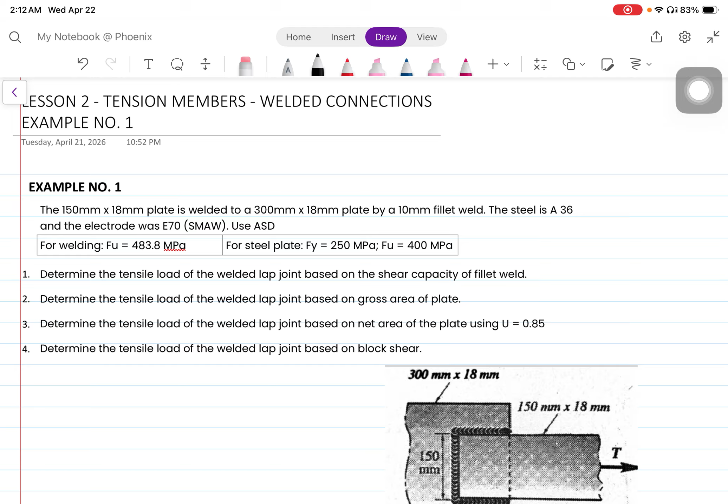Welcome to part 2 of tension members in welded connections, and let us have now our example number 1.

For example number 1, the 150 mm by 18 mm plate is welded to a 300 mm by 18 mm plate by a 10 mm fillet weld. The steel is A36.

And the electrode was E70 SMAW. Use ASD. So for welding, we have the tensile strength of 483.8 megapascals, but for the steel plate, we have Fy equal to 250 megapascals and the tensile strength is 400 megapascals.

First, determine the tensile load of the welded lap joint based on the shear capacity of the fillet weld. Next, determine the tensile load based on the gross area of the plate. Next, determine the tensile load based on the net area of the plate using 0.85 as the reduction coefficient. Then determine the tensile load based on block shear.

Baka nagtataka kayo na meron gross area, meron net area, meron block shear. Hindi naman siya na-discuss during the introduction, right? Take note na kung ano yung ginamit natin during our bolted connections, gagamitin din natin dito sa ating welded. Nadagdag lang ngayon yung shear capacity natin pagdating kay fillet weld.

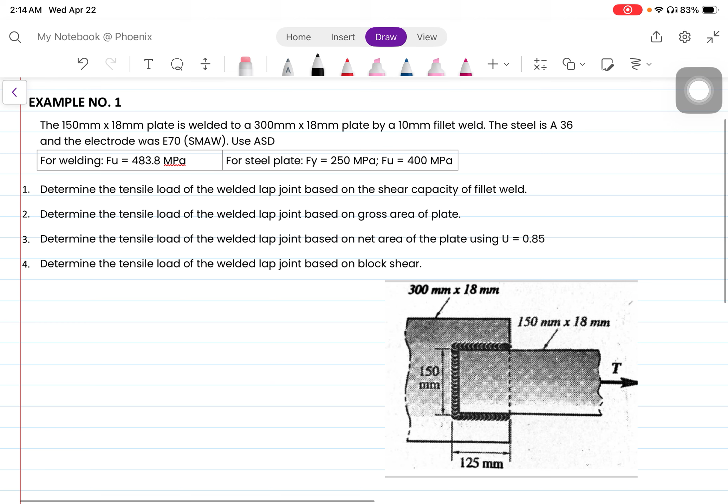So with that, let us now solve for number 1. Pero lagay muna natin, isa-isahin muna ulit natin yung mga given sa atin. Binigay na tayo agad ng 10 mm fillet weld, so therefore this is already your W.

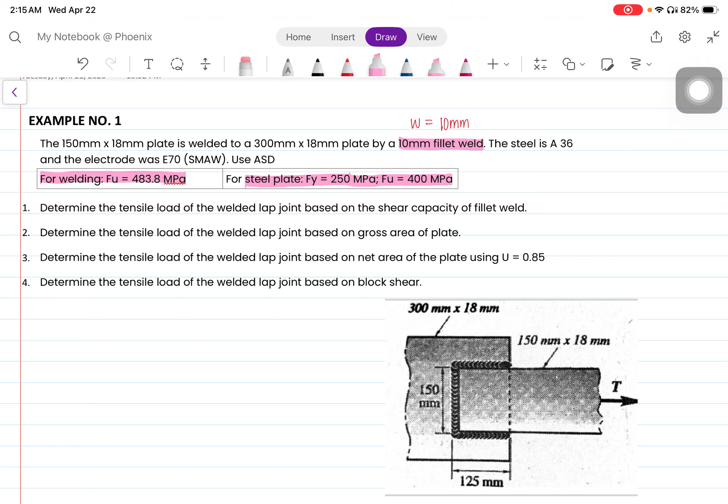Hindi mo na kailangang maghanap or mag-design pa ng weld size mo. Binigay din sa atin that this is an A36, pero nagbigay na rin siya ng FU equal to 483.8 megapascals for our welding. And then for the steel plate naman, Fy is 250 megapascals and 400 megapascal naman for our tensile. Okay, and this is our figure.

Now sabi sa atin, hanapin daw muna natin si shear capacity of the fillet weld. So actually, this is just the tension pa din naman yun, no?

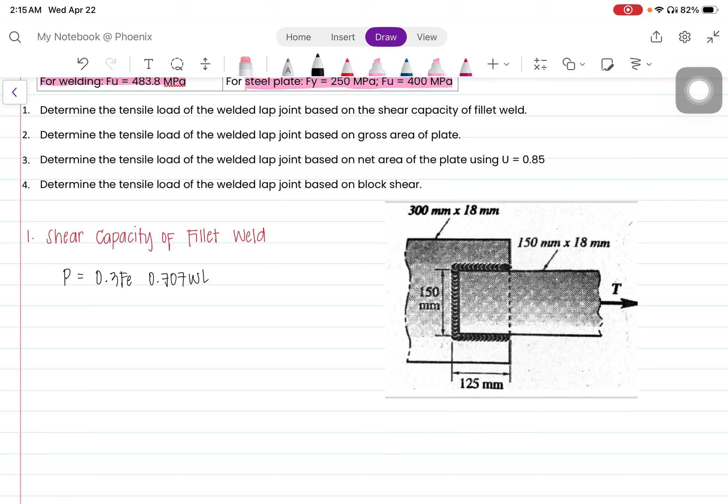So with this, ano na nga yung formula natin? Di ba ang formula natin dito is P equal to 0.3 FU natin multiplied by 0.707 ng ating WL. Okay, so ang gamit nga pala natin is FEXX. So si FEXX dito, this is also the FU. Ito lang din yan, wala namang problema.

Kaya lang, baka lang kasi malito kayo, dalawa yung FU natin - isang FU para kay welding, isang FU para kay steel plate. So with this, do we have values for everything? Yes, tama. So ibig sabihin, ang gagawin lang natin dito is to substitute the given values.

So we have 0.3, ang FEXX natin given sa atin is 483.8 megapascals, then we multiply it by 0.707, and then our weld size is equivalent to 10.

Okay, now the question is, ano si L? The L is the total length, total length mismo ng ating buong weld. So ibig sabihin, ano ba yung mga wineld natin? Di ba itong part na to? Ayan, so inano natin to, wineld natin yung part na yan. So ibig sabihin, yan yung kailangan natin.

Sasama natin - una meron tayong 125 sa ibaba plus 150 sa kaliwa, and then another 125 sa itaas. Then we can now solve for P.

And solving for P, ang makukuha natin dito is 410,455.92, and this is in Newton. So anong ginagawa natin dito para maging kilonewton? We divide it by 1,000. Therefore, makukuha natin P is equal to 410.456 kilo Newton. So with this is now our final answer.

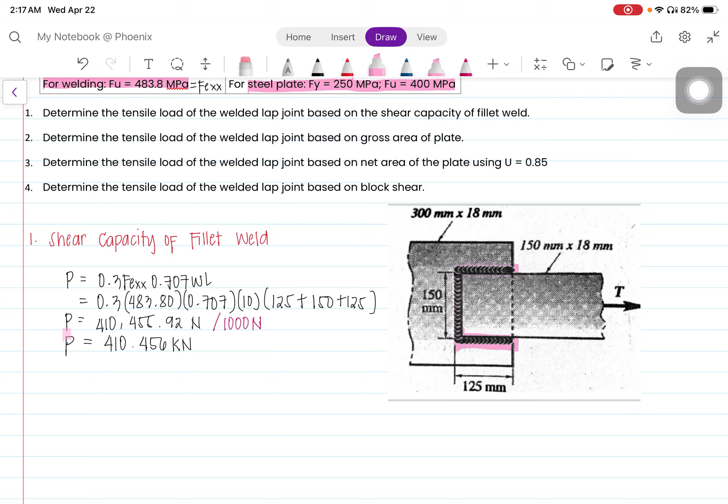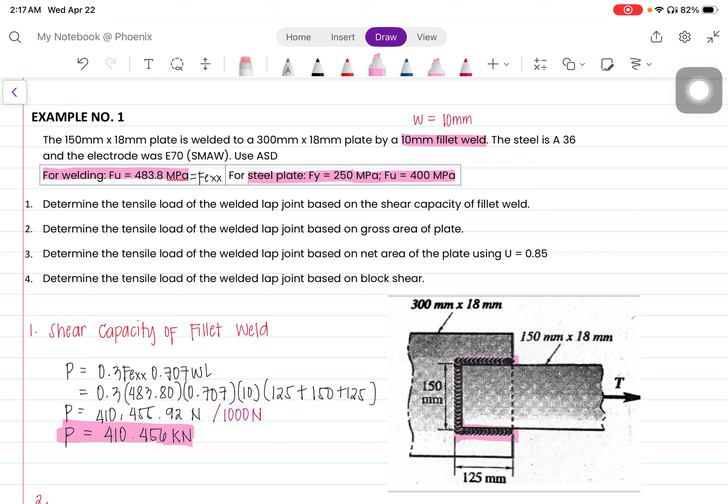Okay, then next naman natin for number 2, ang tinatanong sa atin is the gross - okay, the tensile load based on the gross area of plate. Ito kasi kanina, based on shear capacity of fillet weld. So dito naman tayo na for the gross area of the plate.

Okay, so sana natatandaan pa. Ang formula lang naman natin for the gross area, ano yung allowable natin dito? This is 0.6 Fy Ag. Yun lang din siya, same pa rin naman tayo ng formula.

Okay, so let us just substitute. We have 0.6, ang Fy natin na given is 250. And how do we solve for the area gross? Eh, di ba, ito yung area natin dyan, dito natin kukuhanin yon. So, ano ba yung total nito?

That is, ano yung height niya? That is 150. Ano yung thickness? That is 18. So, therefore, we get now 150 times 18, and that is already your area gross. And solving this, makakakuha tayo ng sagot na 405,000 Newton. And we divide this by 1,000 Newton para makakuha tayo ng 405 kilo Newton, and this is already our final answer.

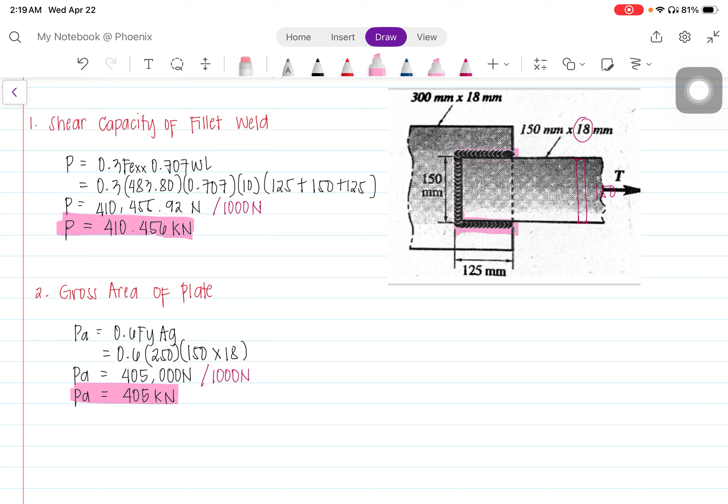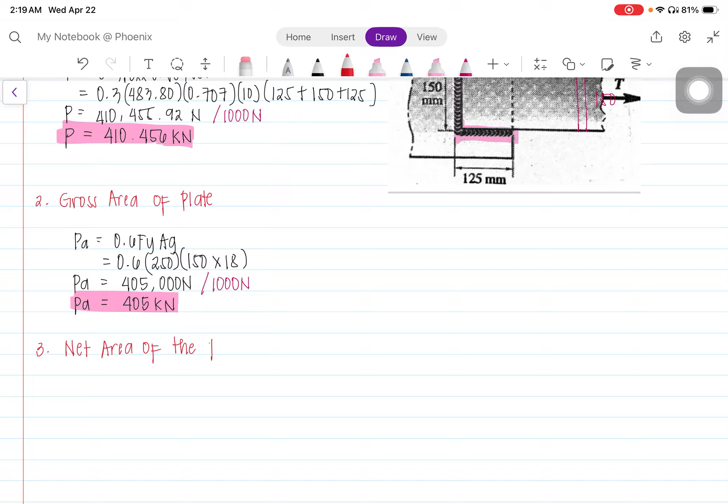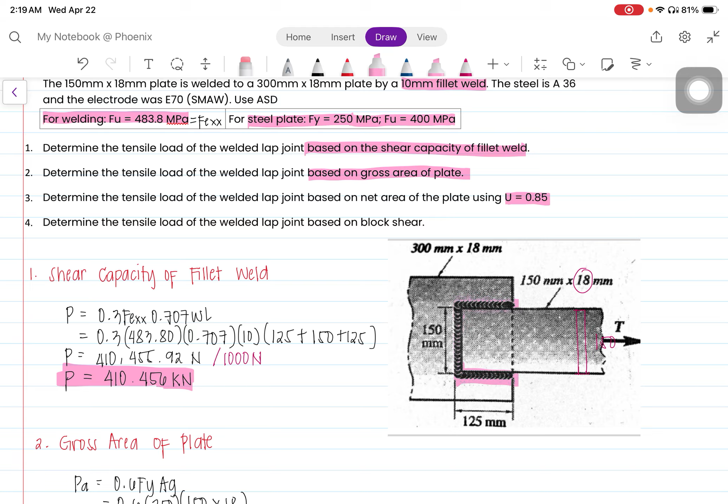Okay, so next naman natin, let us move to the net area of the plate. So yun naman yung tinatanong sa atin, net area of the plate. Ngayon, ang tanong, ma'am, wala namang butas, ano tatanggalin natin dyan? Take note, nagbigay siya ng reduction coefficient. So ibig sabihin, i-reduce lang natin, doon natin kukuhanin yung pagiging net area niya.

So ano nang i-formula natin for the net area? That is 0.5 FU AN. Okay? Wherein ang AN natin will be U AG. Okay? Are we clear? So let us just substitute the given values.

We have 0.5, ang FU natin for the steel plate is 400 megapascals. And again, ano yung U natin? That is 0.85. And then, our AG is, again, that is 150 by 18.

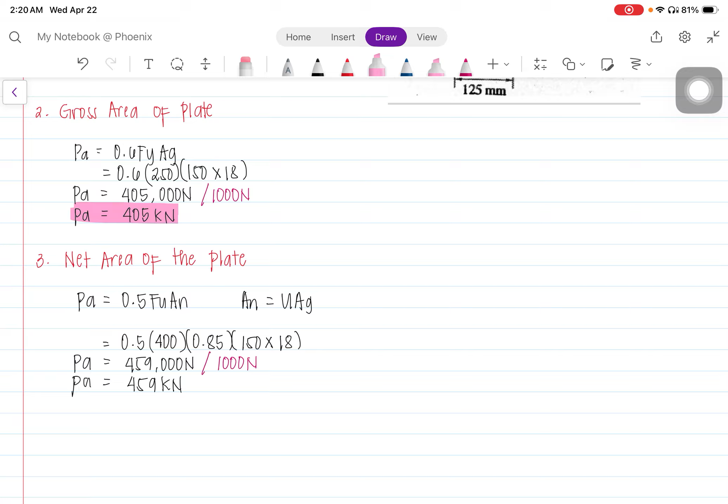So with this, makakakuha tayo ng value ni PA na 459,000 Newton. And we divide by 1,000 Newton para makakuha tayo ng value na naka-kilonewton, which is 459 kilo Newton, and that is our final answer.

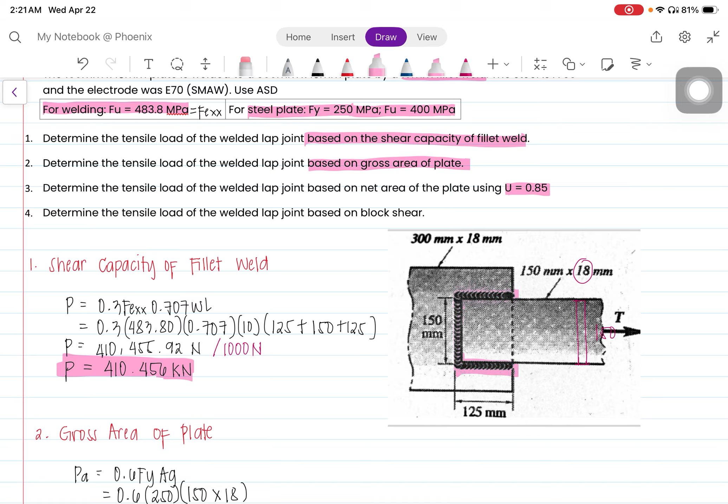Okay, and lastly, so for the last natin, we are now required based on the block shear. Okay, so same pa rin tayo, formula pa din niya. So block shear, ano na nga yung formula natin dito? The formula here is PA is equal to 0.3 FU ANV plus 0.5 FU ANT.

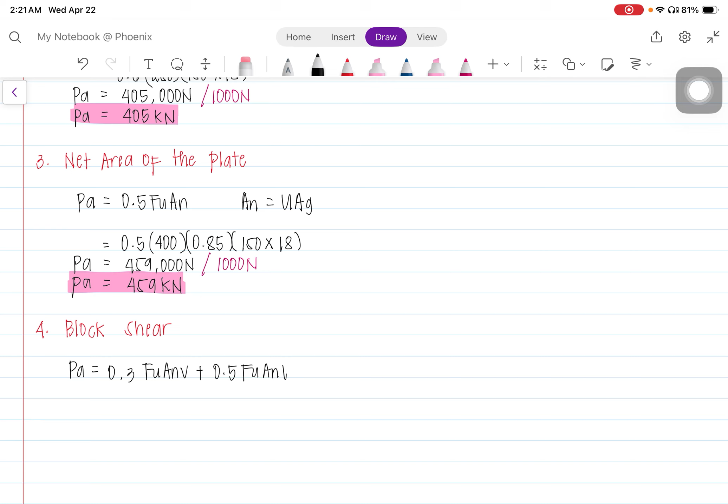Okay, ma'am, paano naman si ANV at si ANT? So same pa din. Paano natin masasabing same pa din? Your tension, your shearing should be ito pa din nasa horizontal. So kung may shearing ka sa taas, may shearing ka rin sa baba, magkasama yan.

Pag naman, okay, so dito si ANV. Pagdating naman ngayon kay ANT, okay, kay tension, saan ba tayo nagkakaroon ng tension? Dito pa rin sa vertical, so andito si ANT.

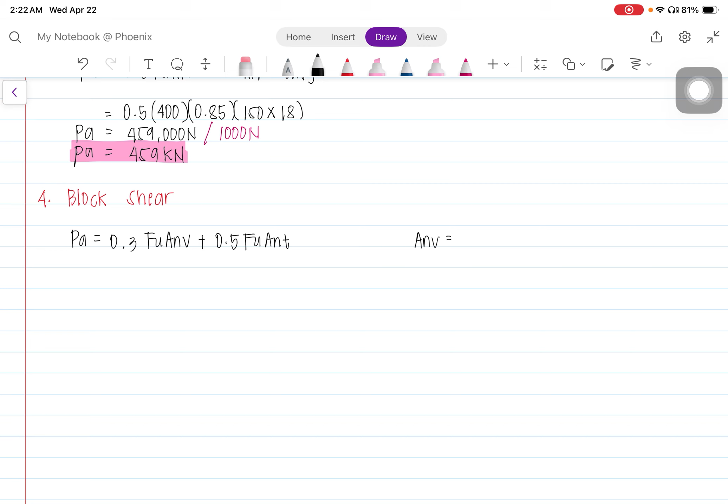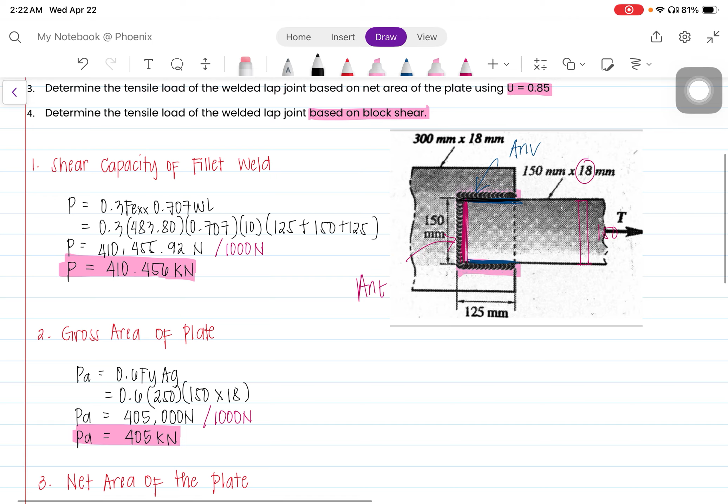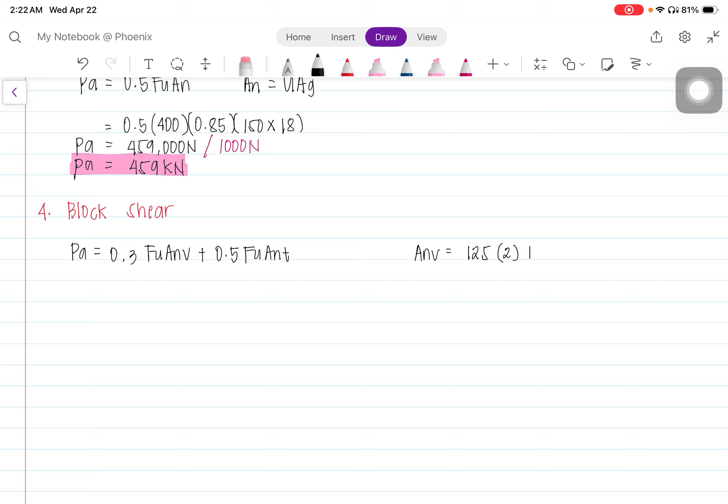So let us solve first for our ANV. So sabi natin for our ANV, ano daw yung ating dadaanan? Eh di ba dinaanan natin magkakaroon sila ng shearing? Okay, so yung buong pinaglagyan ng weld natin, and ano yon? That is 125. Okay, 125, and then dalawa, kasi meron tayo sa taas at meron tayo sa ilalim. Then we multiply it by the thickness of 18. So our ANV is equal to 4,500 mm squared.

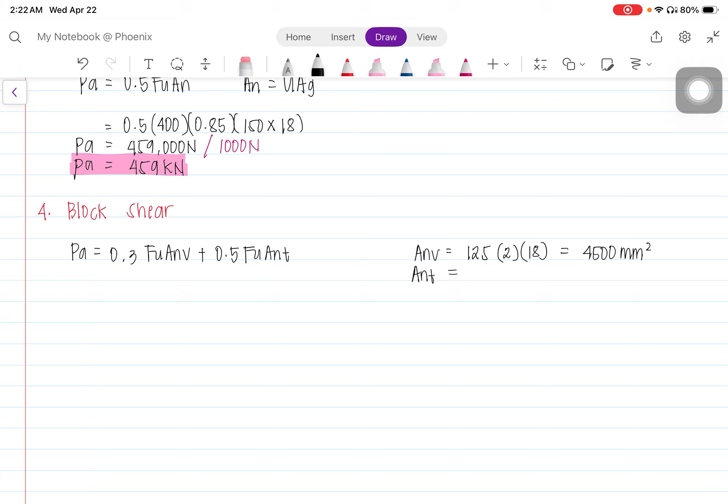Then what about kay ANT? Okay, kay ANT, isa lang, yung nasa kaliwang side lang, 'di ba? And we know that that is 150 mm. Okay, 150 mm, isa lang, wala tayong multiply, ang multiply na lang natin is the thickness. And to get now this, we have 2,700 mm squared.

Then solving now, let us just substitute the given values. We have 0.3 multiplied by 400 multiplied by ANV of 4,500, plus we have 0.5, again 400 megapascals multiplied by 2,700. So we can solve now for PA na 1,080,000 Newton. And again, we convert this into kilonewton by dividing it by 1,000 Newton. Then makukuha nating PA equal guys 1,080 kilo Newton.

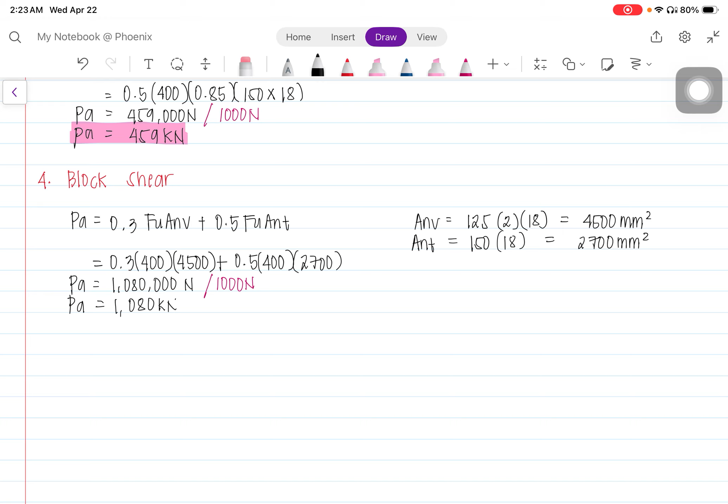And that is already our final answer.